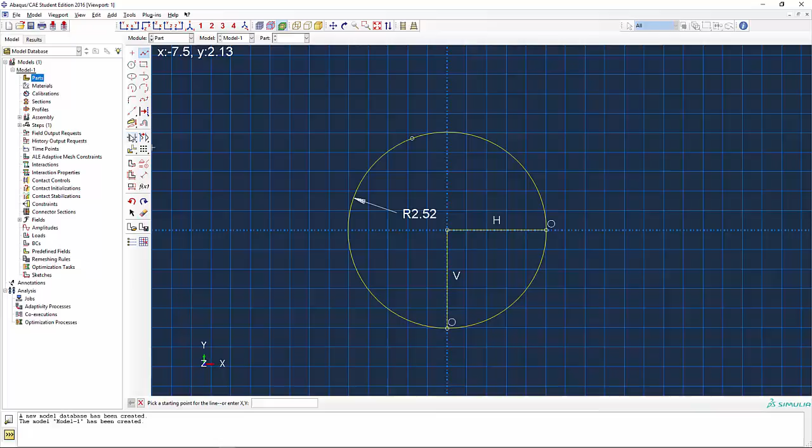Right? And now I'm going to create a section of the shaft, so we're going to create two lines from the center horizontal and then from the center downward, and then we're going to trim the part using this technique that is auto trim. And just to be sure, we'll dimension the radius, make sure it is 2.52 inches. We're done with this, and now we need to extrude this one. We're going to extrude the shaft by 2 inches, which is the default depth.

Now, what we want to do here in this case is that we want to make sure that we know the surface that we are using for the contact. Once we assemble the surfaces during the contact process, and if the surfaces are attached together, it's going to be extremely difficult to pick the surfaces for the master-slave considerations. So we do that ahead of time. Before doing that, we're also going to partition the shaft to make sure that we can place the ring on the shaft appropriately. This is how we're going to do this.

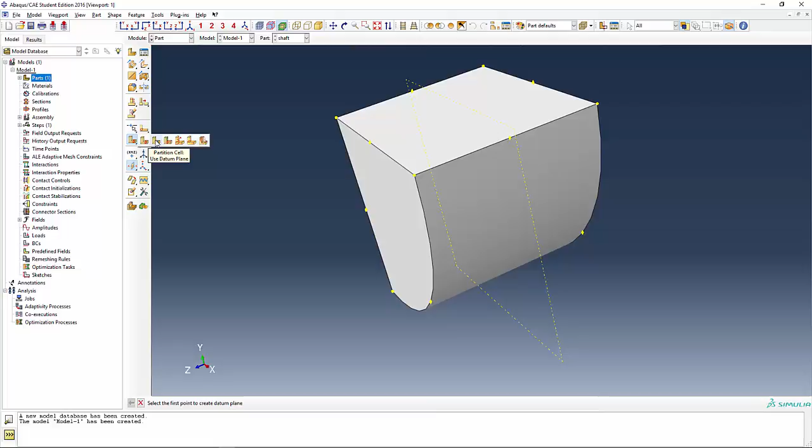We're going to go ahead and first create what we call a datum plane, halfway between 2 points, and those 2 points are going to be the two far edges of the shaft. And then we are going to partition the cell using the datum plane. All right, so we're going to go ahead, pick the datum plane and create partition, and you're done with this one.

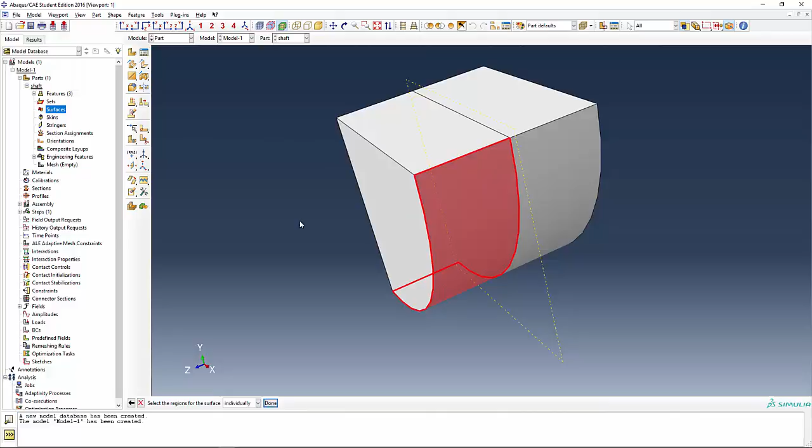And now I'm going to go ahead and create this outer face of this section as the surface that is going to make the contact. To do so, I'm going to open the part and the shaft and double click on the surfaces, and we're going to call that shaft surface. Continue and pick this outer face, and we'll say done. Okay, so that's what we call the shaft.

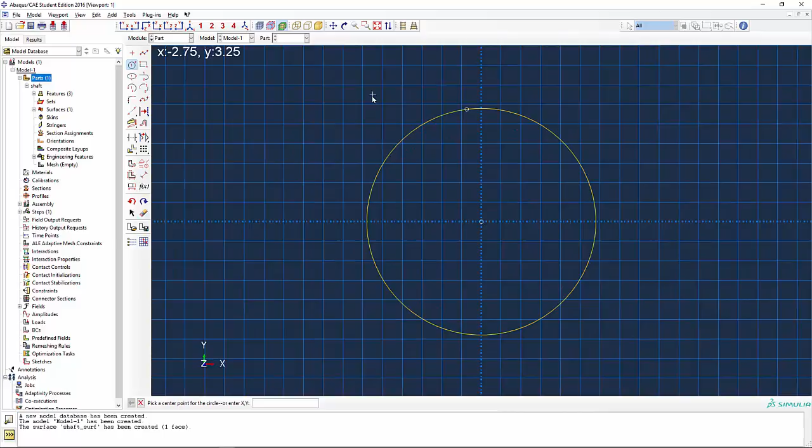And now we're going to create another part. We're going to call that one sleeve. Same routine, the solid extrusion, approximate size of 20. In this case, we're going to go ahead and create two circles that is going to be depicting the ring representation. Circle number 1 and circle number 2, and we'll dimension them appropriately. Dimension the interior one to be equal to 2.48, and dimension the outer one to be with the radius of 3.0.

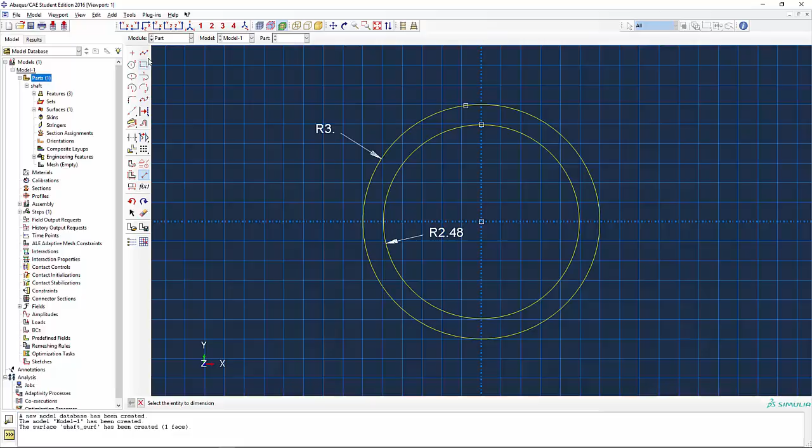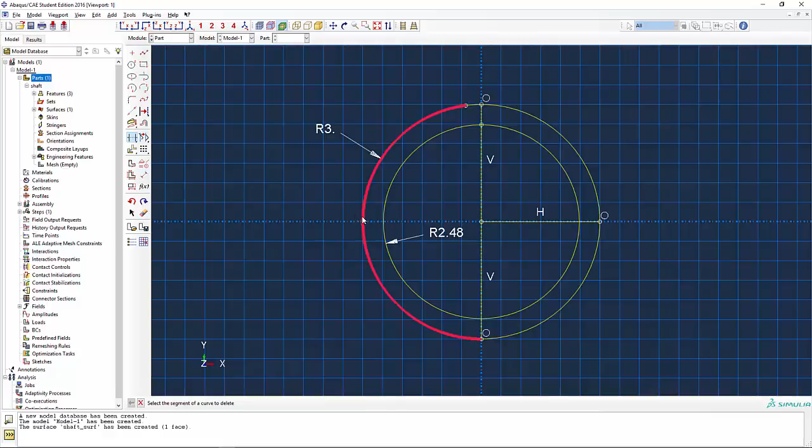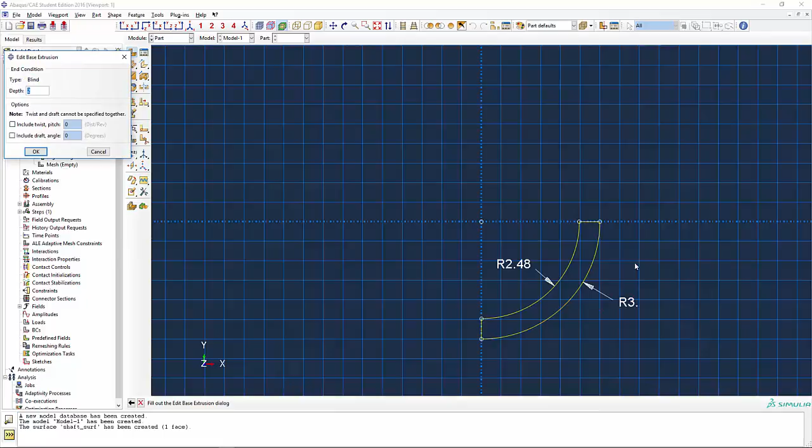Okay, and we repeat the process of partitioning this to create a section of the sleeve like this, and then the horizontal line. Actually, let's take it back. Line vertically to the bottom, and then auto trim this thing like we had done before, except this thing has not been trimmed off. So we're gonna go ahead and trim it like this, and then delete these lines as well. Just to be sure, we'll dimension the radii. 2.48 is good, and 3 is also good. And the depth in this case is going to be slightly smaller, 1 inch extrusion depth.

And now you notice the interior surface is going to make contact with the shaft, so we're going to go ahead and open the sleeve in this case and create a surface. We're going to call that sleeve surface. Continue and pick this surface and say done.

Okay, now we're ready to introduce the material. The shaft material is going to be made of steel. The sleeve material is going to be made of a brass. So we'll go ahead and click the material. The first one is steel. We're working in the inch unit, so we're going to go ahead and give it the modulus of elasticity of 30 e to the 6 psi and a Poisson's ratio of about 0.29.

Okay, and the next material is going to be brass, and mechanical properties approximately is going to be 14.1 e to the 6 psi for the modulus of elasticity and 0.31 for Poisson's ratio. And while we have the brass part, which is the sleeve, in front of us, we can go ahead and start creating 2 sections as well. So double click on the sections. Let's go ahead and call this steel section.

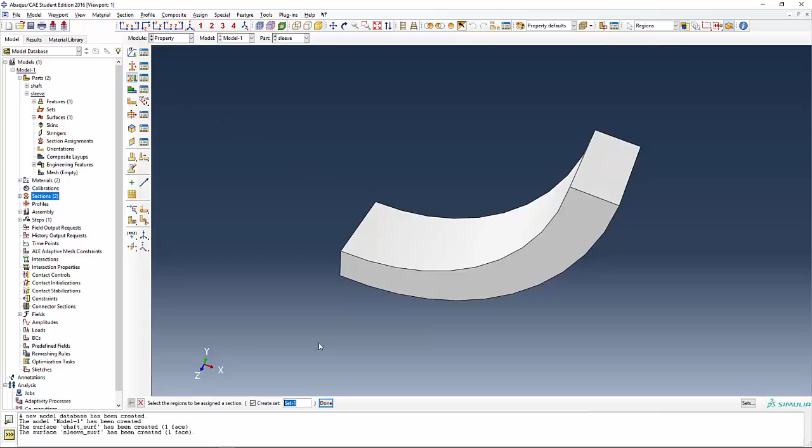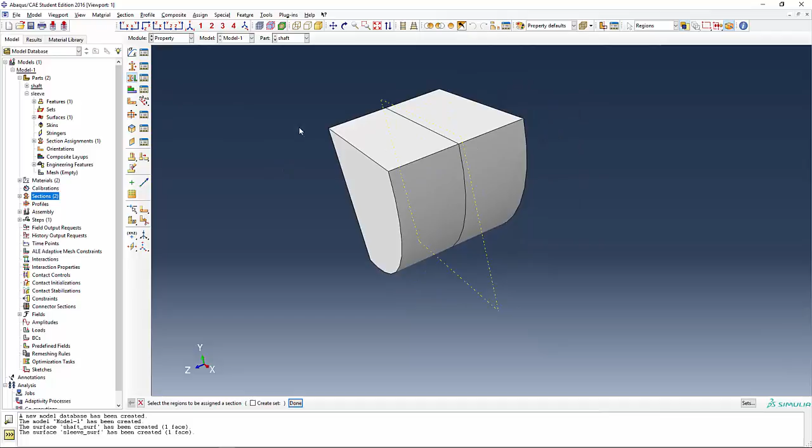And now we assign the section to, I'm going to uncheck the create set, pick this whole brass part, which is the sleeve, and assign the section that we're going to call brass section to this thing, right? And notice the part is set to sleeve. I'm going to simply switch that to shaft and assign the section by drag selecting the whole thing and say done. And the section is going to be the steel section. So we created the sections.

Now we're ready to assemble the parts. The way we do that is double click on the instances, and the first thing I would recommend you doing is to do auto offset from other instances, so when the sections are assembled they won't be going into one another, and that way it's easier to move them away. So holding the shift key, pick the shaft and the sleeve and say OK.

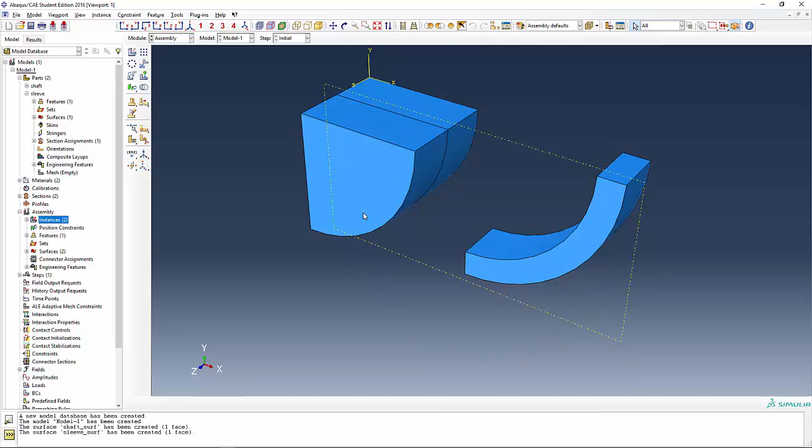Now what we want to do is we want to bring them together and line them up. Notice we have a plane that we call the cut plane. This is the symmetry plane, so we want to line them up. First things first, we want to create a concentricity constraint. The last icon on the top section, create constraint, click and hold and move to the right. There's an icon called create concentric coaxial. That's a very good icon to make sure that these two items have the same center or concentricity.

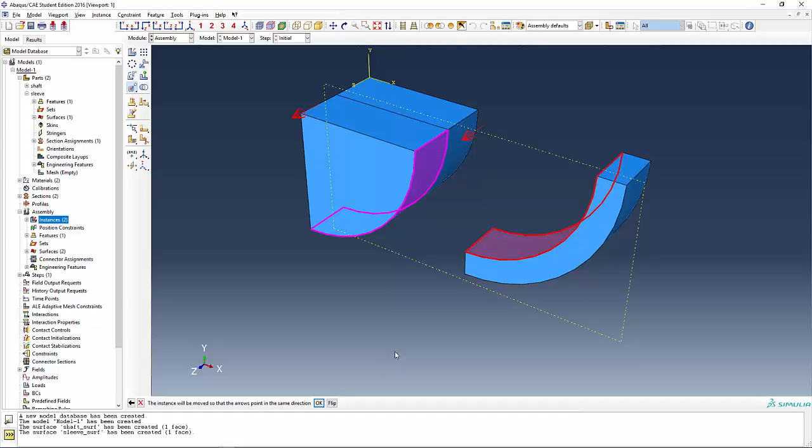So we're going to pick the cylindrical or conical face of the movable instance. So we're going to pick this face, meaning the sleeve is going to move. And notice the prompt region says to select the cylindrical or conical face of the fixed instance. We're going to pick this instance. Be sure the two arrows are in the same direction. If they're not, you need to click on the flip and flip one of the arrows to make sure that they're in the same direction. Given that, now that the arrows are the same, we'll say OK.

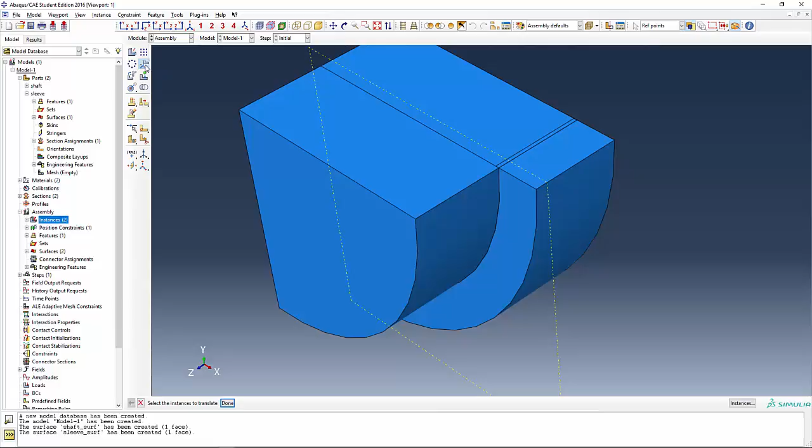But notice where they're lining up. They're lining up in the far side. So what I want to do is I want to translate the sleeve so it'll be lining up at the tip over here. So to do so, I'm going to use the translate instance feature, pick the sleeve and say done. And very carefully, you want to pick the point over here that is lining up with the line at this

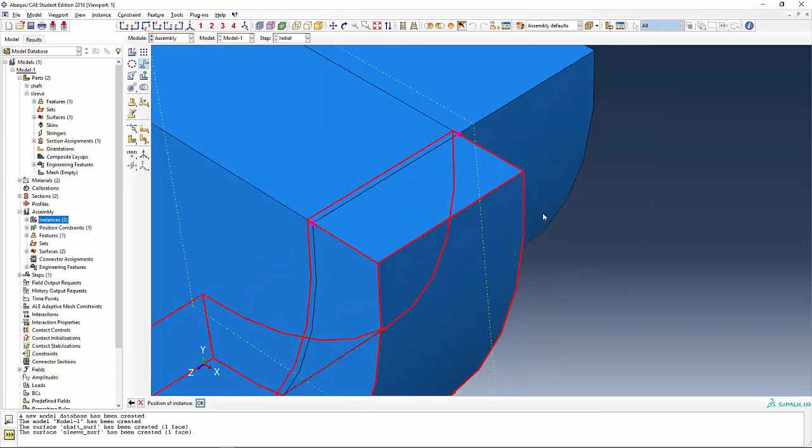end rather than the point on the sleeve. Otherwise you will move diagonally rather than straight horizontally. So I want to pick this point as the starting point and this point as the end point. And if you zoom out, you'll see they're lining up. Oh, great. And be sure to say OK to the positioning. So the positioning is done, and you're now ready to create a step for the solution.

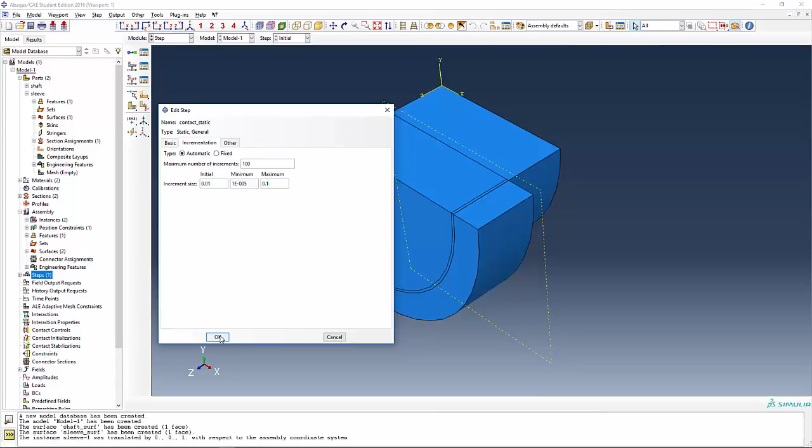So double click on the step. This is going to be contact static. So we're going to go ahead and use static general, continue, leave this alone, go under incrementation tab, and I would suggest pick a very small increment of load such as 0.01, and the maximum I also want to make it 0.1. Leave the number of increments alone and say OK. The field output and history output should be set to output at every 1 increment, and that's the thing I would check to make sure that you get enough data point, and that is correct.

And we're ready to create interaction, meaning the contact interaction. The first things first, we'll create interaction properties. So we're going to say this is contact property that I'm creating for the contact, and click on continue. We are working with the mechanicals, so the first thing is tangential behavior. In this case, I want to provide it with a coefficient of friction, so instead of frictionless, we're going to do the penalty approach and apply the coefficient of friction of, let's say, 0.05 as the steel to brass coefficient of friction, and then do mechanical, normal behavior, and set everything as the default and say OK. And now we're going to go under interactions.

Interactions is going to be surface to surface contact, which is the default, and we're going to go ahead and say contact definition and continue. Now this is where the selection of the surfaces ahead of time is going to come in handy. Notice these are lining up together and it is hard for you to select the surfaces. Instead, if you look to the right hand side of the prompt region, you notice the surfaces.

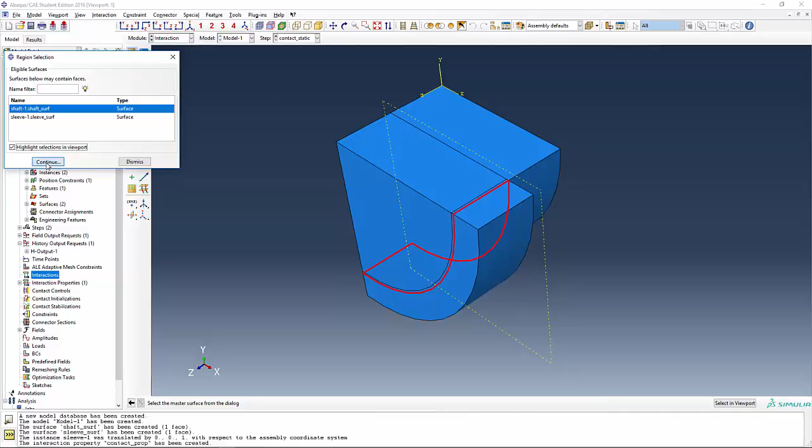Click on the surfaces. You want the master to be perhaps the shaft one, because this is the harder of the two, and you can do highlight selection in the viewport to highlight that one and say continue. For the slave, you pick the surface region again and pick the sleeve as the surface and say continue as well. Leave everything here alone, except be sure the contact interaction property is set to what you had created.

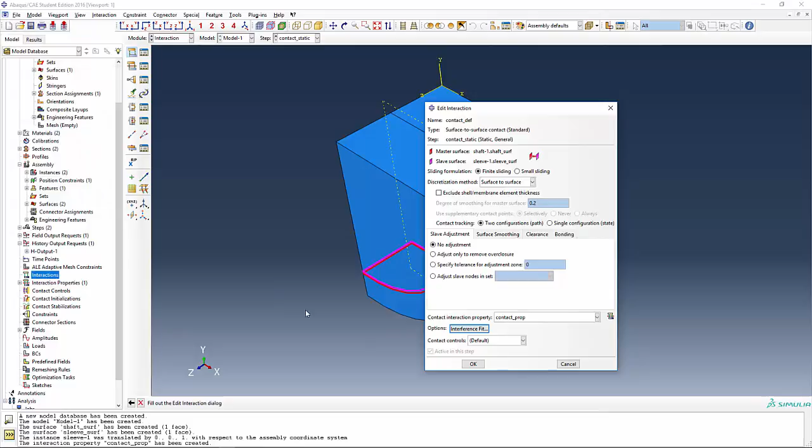And then, since we are going to say that initially we have interference, click on the interference fit and pick the second radio button that is called gradually remove slave node overclosure during the step, and leave it as automatic shrink fit for the time being and say OK and OK, and now you've created the contact.

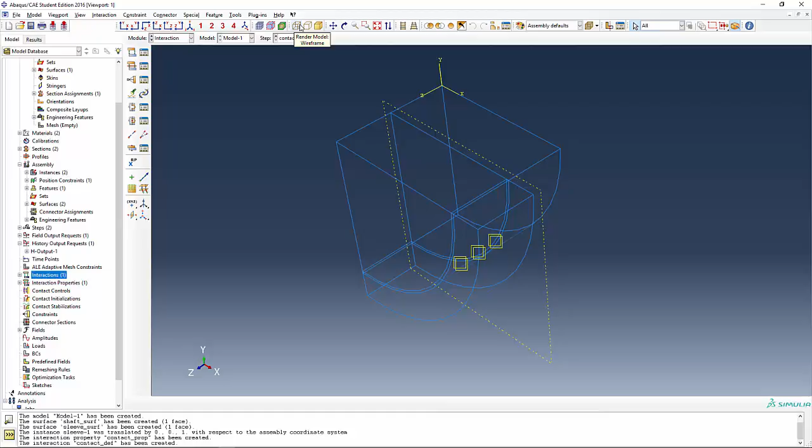Now typically when you create contact, you will see the yellow squares showing up, except that the surfaces are hidden in this case and we cannot see that very well. In case you're interested in seeing it, if you go to the wireframe representation of the model, you can see those yellow squares. So we're going to go back to the solid representation.

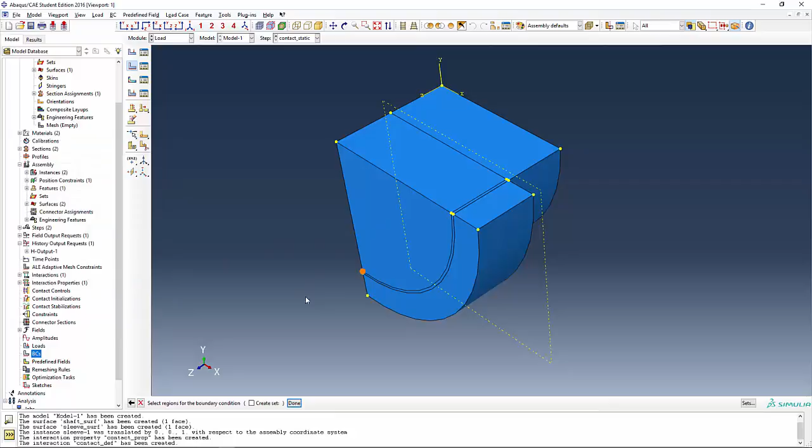The boundary conditions are going to be interesting. They're going to be practically just symmetric boundary conditions or cut boundary conditions. So first boundary condition, I'm going to go displacement rotation and say Z sim. That's the symmetric boundary conditions with respect to the z-axis, and we pick the surfaces that we need to pick. So let me go ahead and close that and start again.

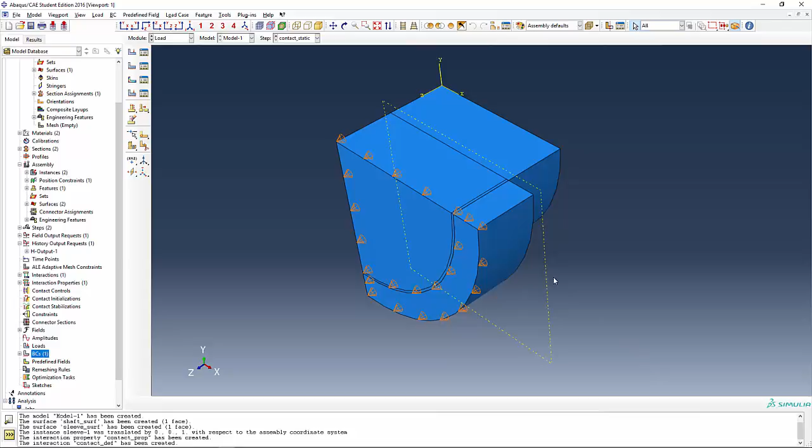Boundary condition, displacement rotation, z sim, continue, pick this face, and also holding the shift key, pick the sleeve face along the z direction and say done. Simply restrain U3. All right, and we're going to do the same thing to the top face. So double click on the boundary condition, and we're going to call that one, being along y direction, y_symm. Continue, and be sure to pick all the faces corresponding to that, and that's going to be U2 fixed.

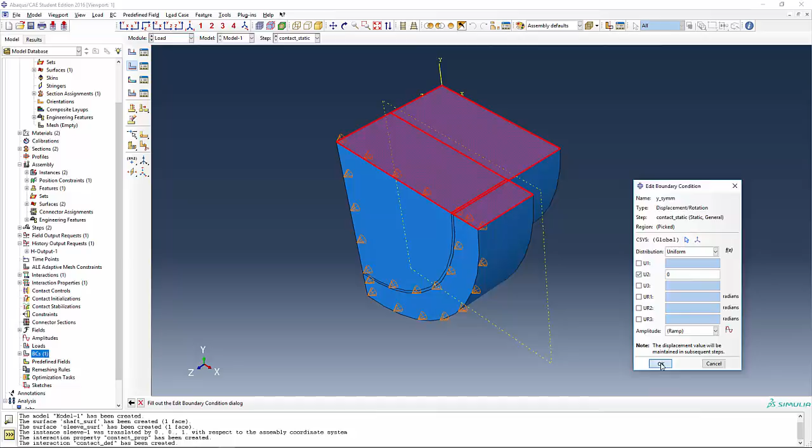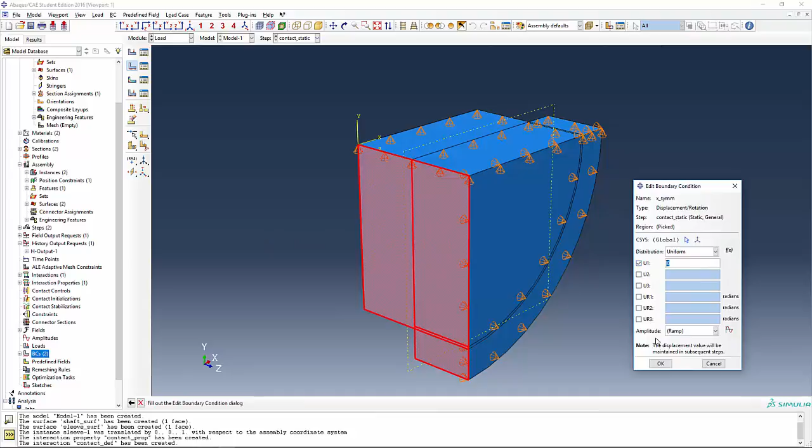And finally rotate the image so you can apply the symmetry along the x direction. So this is going to be x_symm for the boundary condition. We'll say continue, pick all of those faces again, and U1 is set to be equal to 0. You've set the boundary condition. You don't need to apply the load. Load is coming from relaxing the interference, and that's where the contact pressure is going to develop.

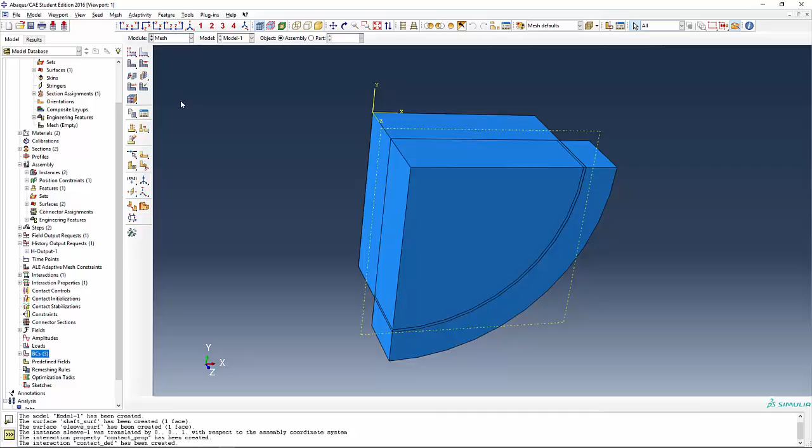So the last thing we need to do is create the mesh. So we'll switch to the meshing task and pick the two parts. The first part is going to be the shaft. You notice it is automatically highlighted in green, meaning you're capable of doing the sweep mesh of this part. So I'm going to go ahead and assign element type to the whole thing, and it is set for linear hexahedron. I'm going to uncheck reduced integration and say OK, and then go ahead and assign mesh control.

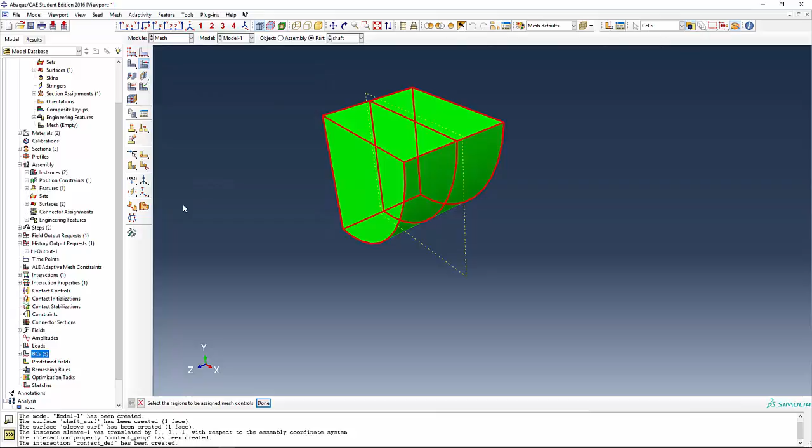Again, select the whole thing. It is structured, or you can do the sweep meshing, either one. Structured is fine. We'll say OK. The approximate size, if you say apply, you notice it's a reasonably coarse mesh that is hard to get a good result from, but nonetheless you can start with that and say OK, mesh the part, and you're good to go in this case. All right, so you've created the mesh for this thing, and now you're ready to mesh the other part, which is going to be the sleeve.

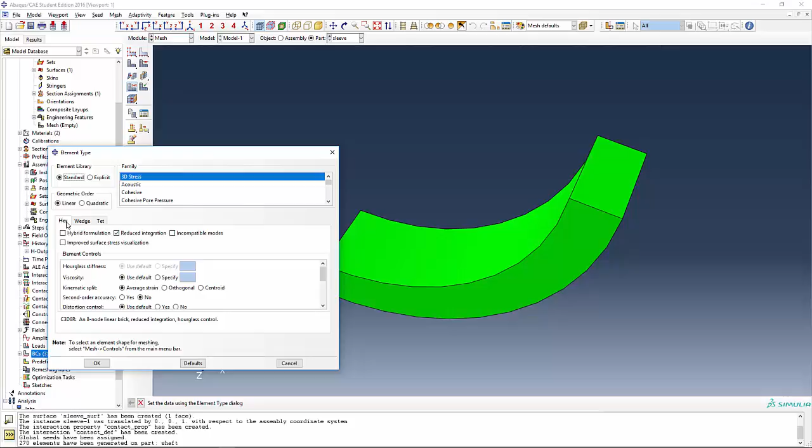We'll do the same thing. 3D stress hexahedron, uncheck reduced integration. We'll say OK, and we're going to go ahead and assign mesh control, which is structured, and then try to see what the mesh is. 0.42. Remember the previous one was 0.36. We're going to repeat the same process and mesh this part as well.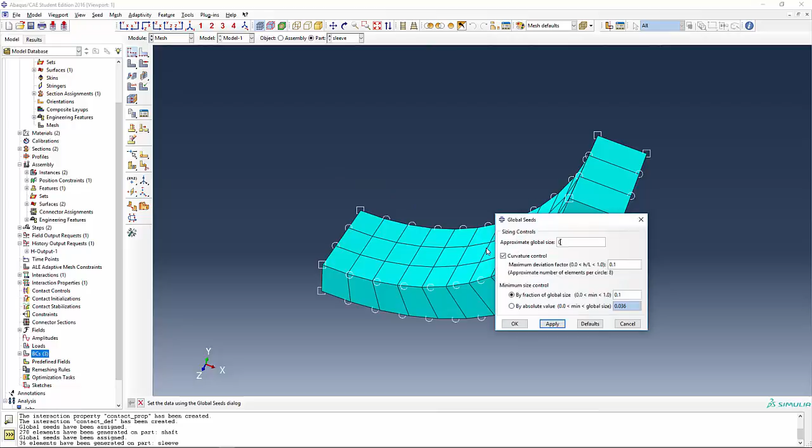Okay, so this is a reasonably coarse mesh. I'm going to refine that a little bit more. So instead of 0.36, I'm going to make that 0.25, and automatically delete the meshes and mesh the part, and you have 128 elements. Now if you click on the assembly, you should be able to see the two separate meshes that have come together. Now this mesh is reasonably coarse, so accurate results should not be expected from this model, but we'll go ahead and run that and see what happens, and we'll analyze the system.

So we're going to go ahead and create a job. We're going to call that something.

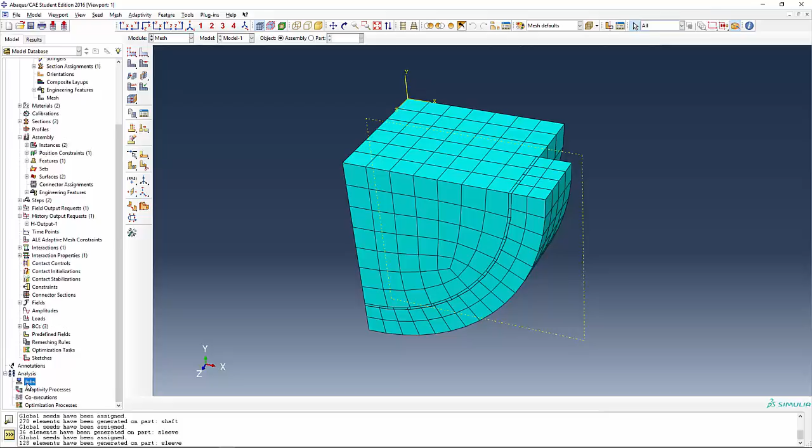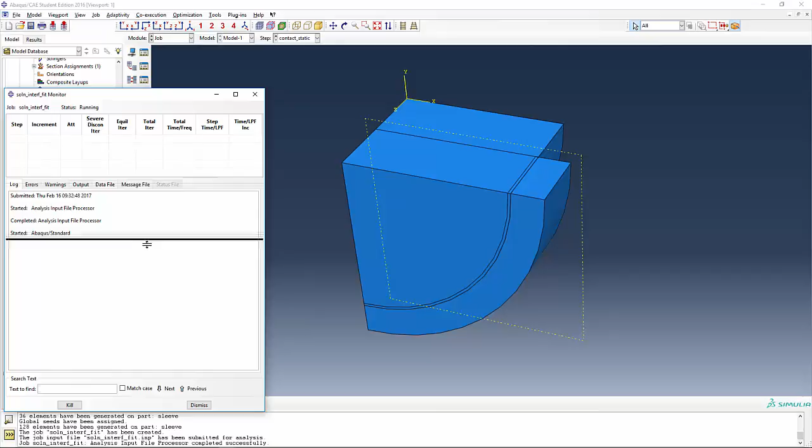And simply submit this thing, and then we're going to monitor the work to be sure there are no errors or warnings or issues. Seems like this thing is rapidly converging toward the solution. It is done. We're going to dismiss and right click on the job and say results.

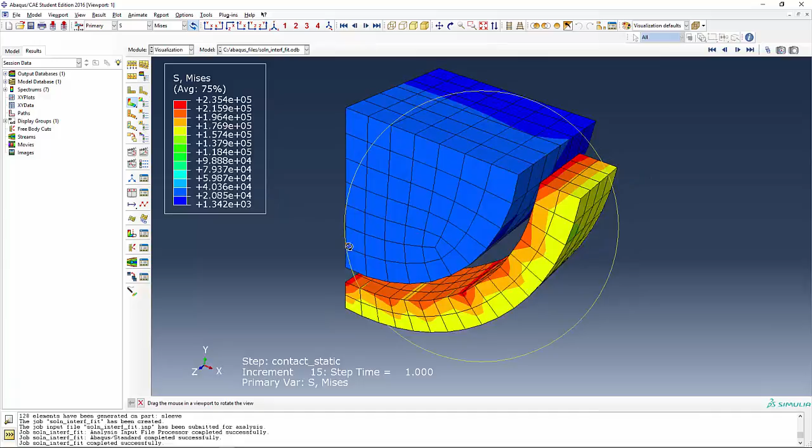Now if you look at the deformed shape, you'll see something very interesting. The two have separated from one another. This is simply an artifact of the scaling of the post-processor. What we're really interested in in this case, instead of the von Mises stress, would be contact pressure, and that would be CPRESS is what you want to look at. And if you look at the CPRESS, it's kind of hard to get a good view because the two models are so close together.

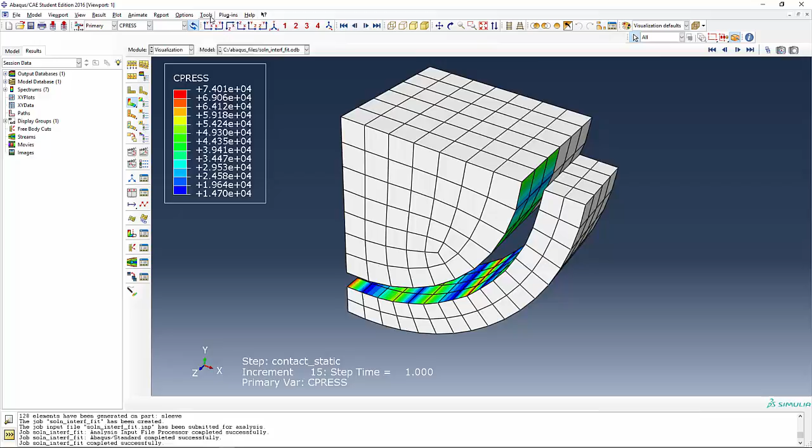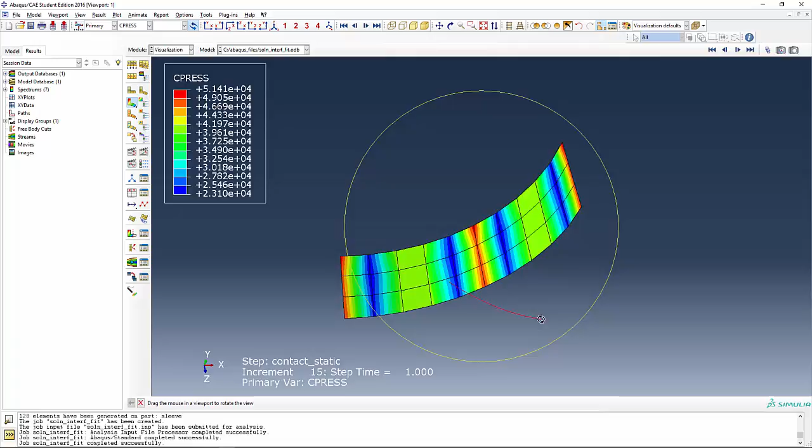One technique that you can use to take advantage of separating the results for each part is to create a group, or what we call the display group. So the icon here is create display group, or you can go from the tools menu, display group, and say create. In this case, since we've created the surfaces, we're going to pick the selection to be the surface. Let's pick the shaft as the surface that we're going to look at, and replace the current drawing with the shaft.

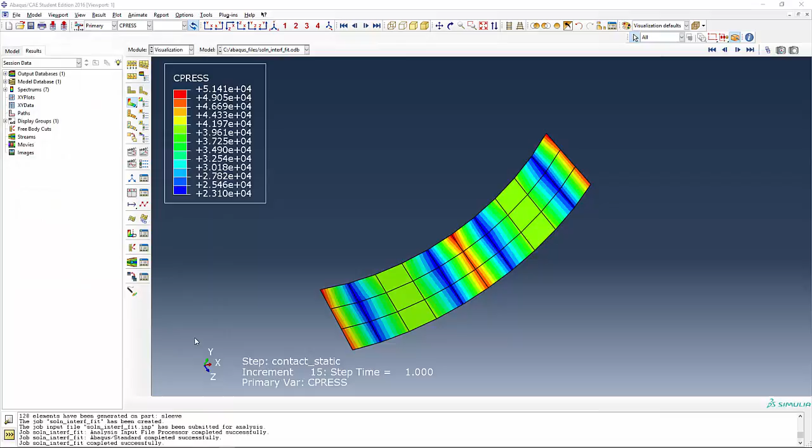You see what happened? Now you can easily view the system. One thing you will notice is discontinuity of the contact pressure throughout. This should be a clear indication to you that the system has not behaved properly. The contact pressure is not doing well, probably because the contact hasn't taken place quite well across all the surfaces due to the normals that are being projected from the master toward the slave components of the surfaces. So that means one of two things: either the mesh is really coarse, or the element type that you selected is not suitable. In this case, you can say with confidence the mesh is extremely coarse, and you should try to modify the mesh. So I'm going to try to do that in the next portion of the analysis.

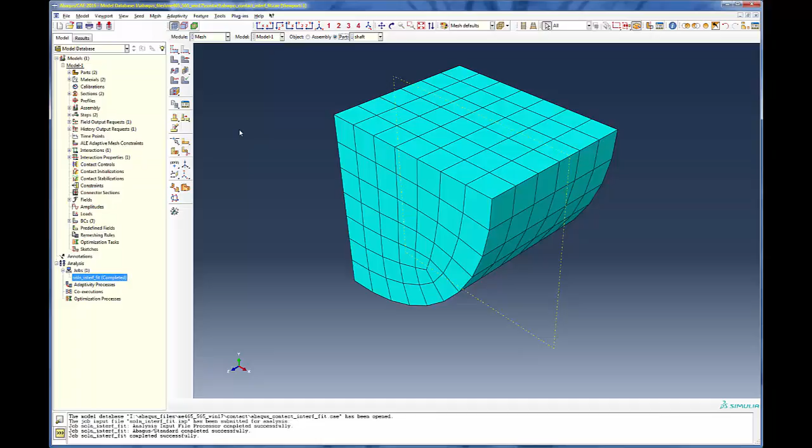Okay, we now attempt to refine the mesh, and I'm going to switch to the mesh module and select the part. This time I'm going to do something completely different. Please keep in mind this is going to increase the number of nodes, and as a result you may not be able to run that in the student edition of Abaqus. You need either the teaching edition or the full research edition of Abaqus to run it.

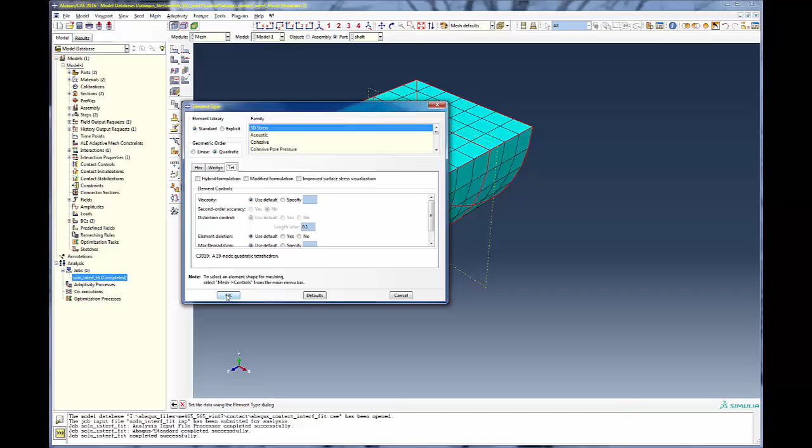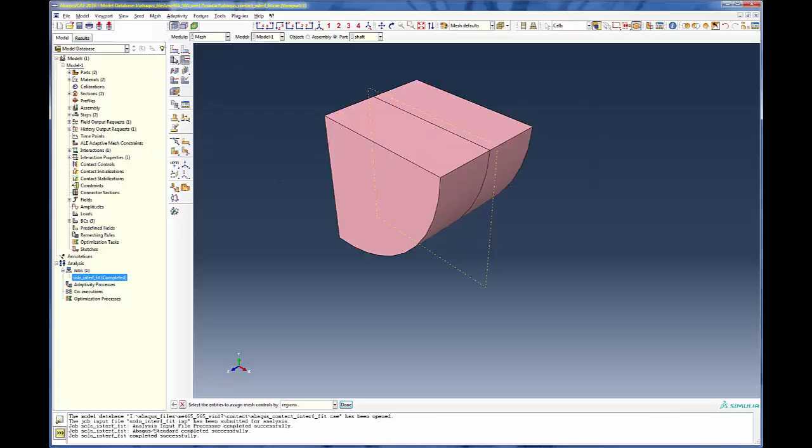So we're going to go ahead and click on assign element type, drag and select the whole thing, and I'm going to switch to quadratic tetrahedron element C3D10 and say OK, and switch the mesh control as well to tetrahedron. That should be automatically switched to free meshing. We'll say OK. Be sure to say yes, automatically delete the meshes. And now we'll see what the mesh is going to look like. This is reasonably coarse, so I'm going to say 0.2 and say OK and mesh the part. And you notice I have about 11,000 elements generated in this case.

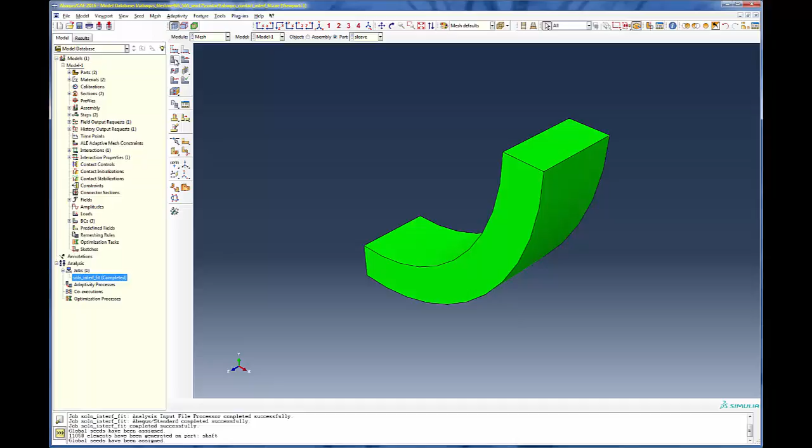And if I were to switch back to the assembly, you notice how this is going to look. I'm going to refine the mesh of the sleeve as well. Leave it as hexahedron, except that seeding the part is going to be perhaps 0.12. And once again, you say automatically delete the meshes and mesh the part. And you're looking at the assembly. Well, it should look a lot more reasonable.

We're ready to go ahead and submit the job and say OK and monitor the work, and double check again, be sure there are no errors or warnings that appear. Seems like everything is starting out okay. We take a look at the iterations and the possibility of severe discontinuity and how many iterations it takes to resolve this thing.

The first increment of an interference fit is always going to be the most challenging one for the equilibrium iteration. After that, it seems to go pretty much smoothly. You notice the time step and the time increment are also steadily increasing, meaning the program is having an easier time converging toward the solution. As a result, it is increasing the increment. You notice you specified that the maximum increment is going to be 0.1. So you should see the time increment at some point reaching 0.1 and then staying at 0.1, except for the last increment, which would be the difference between the total time and the value prior to that.

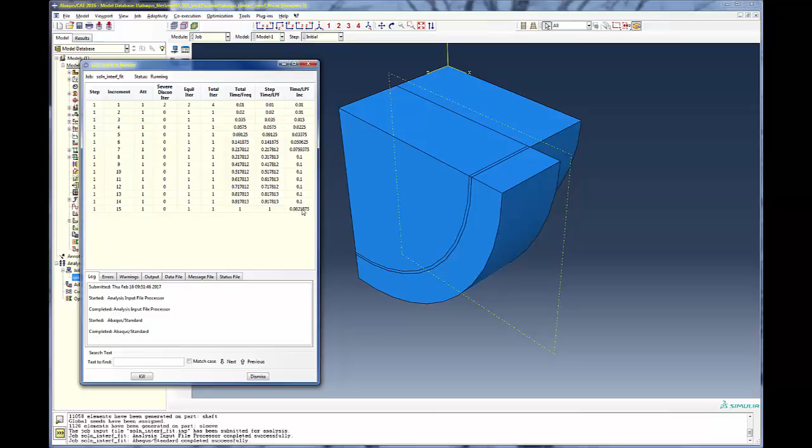So you notice the last time is 0.9178. We said 1.0. Whatever the difference is going to be the last increment. The solution is complete. We'll go ahead and initiate the results, and once again, take a look at the deformed shape. By now you should see it is looking a lot easier so far as the convergence is concerned.

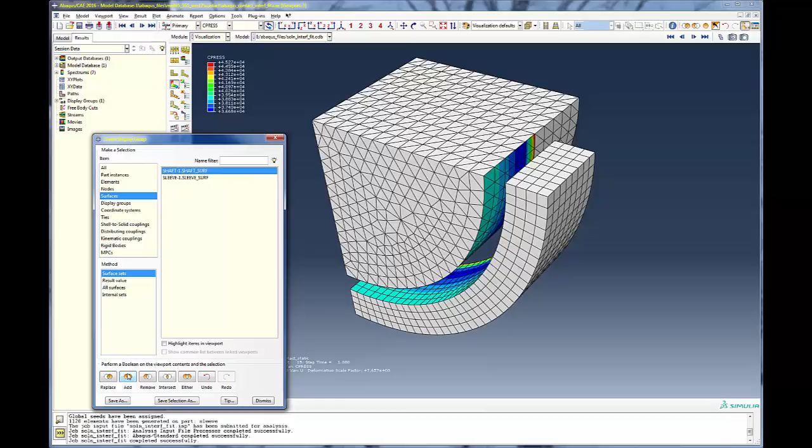And I'm going to go ahead and switch to contact pressure. By a cursory observation, you notice the uniformity throughout the system. We're going to go ahead and do our group, create display group, pick the surfaces, and pick the shaft surface and say replace. And this is what I mean by uniformity of the contact pressure.

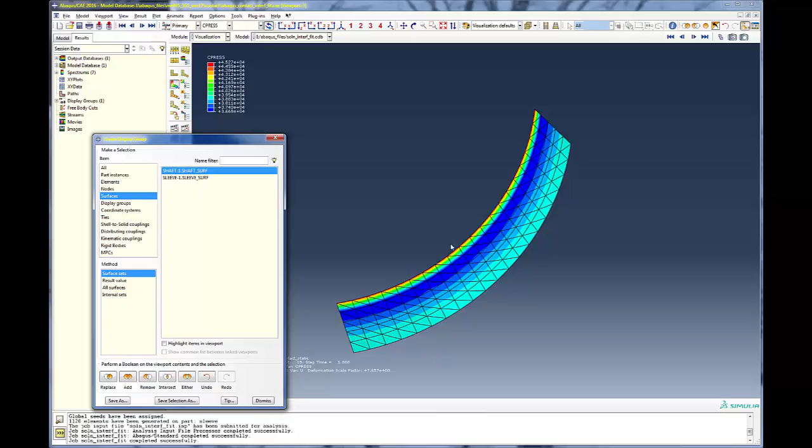The only thing that you need to pay attention to is that where the edge of the sleeve has left the shaft, meaning there's no more sleeve on the other side of the shaft, that's where you're going to have inherent stress raisers, where you're going to have artificially high stress values. If I were to switch back to replace all, this is what I'm talking about. See, now there is no material after this, and as a result you have a severe discontinuity of stress on the shaft, and you will have something similar to that on the sleeve. If you were to do a display group and pick the sleeve surface instead and say replace, you'll see the same thing over here.

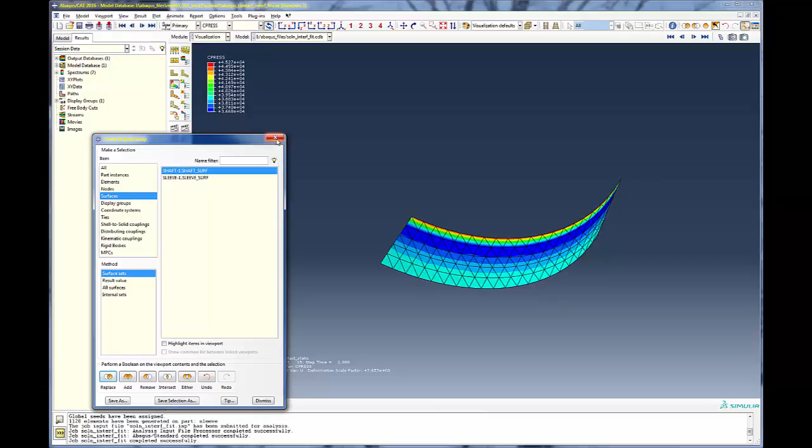So I'm going to go ahead and do an XY plot, and this display group is an easier way for me to pick the nodes that I want to plot. So let's go ahead and pick the shaft surface again and replace that. I'm going to close this up and go under tools. I'm going to create a path along the edge, so it's going to be path, create, and carefully zooming in, starting from one end, I'm going to pick the node list, and let's call that the shaft edge nodes, and continue. You can either pick add before or add after. I always pick add before.

Now I'm going to pick the nodes, holding the shift key. Be sure to pick the center node because the 10-node TET has the mid-side nodes. I'm going to continue selecting this, except that I don't want to pick that last one, since I know that's a discontinuity over here. I don't want to pick that one, pick this one instead, and that's where I'm going to end. Now you notice you have a discrete number of points, so your plot is not going to look very impressive. However, one note of caution is that for you to be able to plot anything, you need to move away from the surface display, because the program does not have any results associated with the surfaces.

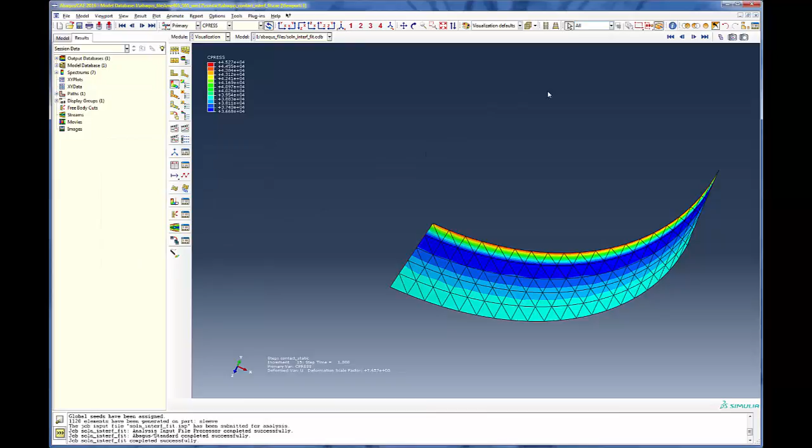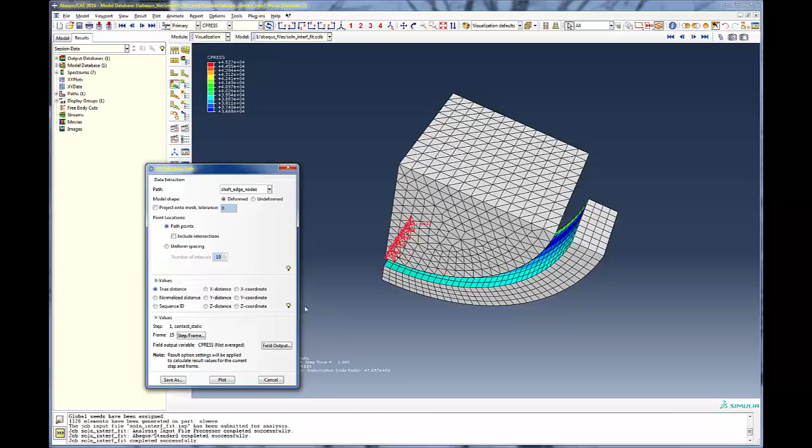So I'm going to do replace all, and now I'm going to go ahead and go to XY plot, create XY data for the path, and continue. You notice the path is the only one that we had, so it automatically picks the elements corresponding to that path, and the contact pressure is the field output. I'm going to simply click on the plot. This shows the variation of the contact pressure as a function of the distance along the path.

Now don't be too scared. Notice the scale. We're going from anywhere from 36.5 to about 40,000 psi, so the difference is about 10% from the minimum to the maximum, and that's what you're looking at so far as the variation of contact pressure. In reality, your expectation is that there shouldn't be any sort of a variation. These are going to be inherent artifacts of the meshing and the contact algorithm, and you can refine the mesh even more to smooth this out.

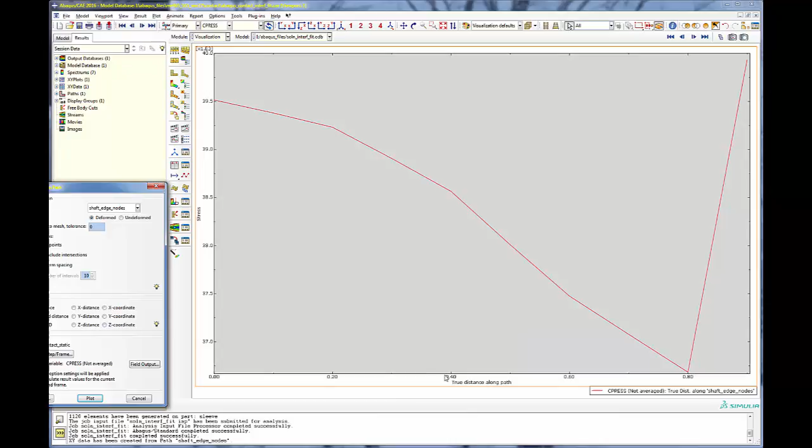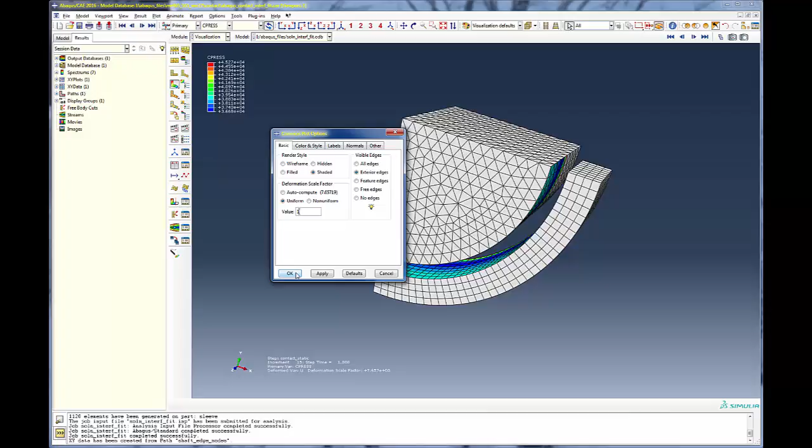All right, so finally, looking at the deformed shape, for those of you who are still baffled about the separation of the two, if you were to go back to the common options and the deformation scale, notice what it is set for. Pick the uniform and set the value to 1, meaning you're looking at a 1-to-1. Now you do see the correct rendition of how these are supposed to be contacting. And if you want to impress